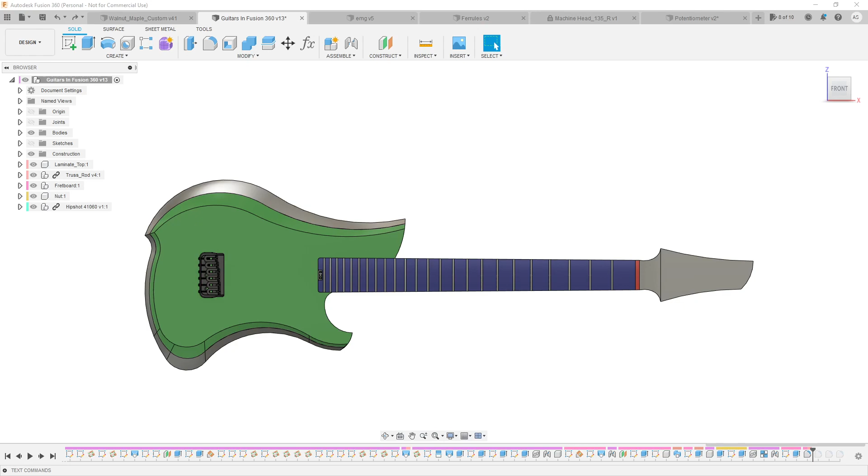Okay, so just like in episode 1 where we laid out some foundational sketches, let's go ahead and do the same thing but for all of our hardware and controls. That way we only have one major sketch, and we're not creating 30 new sketches in this design. So let's go ahead and sketch on the top surface, and let's lay out our tuners first.

So if I hide my body, actually I need that, project in these two lines. I'm going to offset these by 0.375 inches. It might need to go a little bit further than that, but that's okay, I can always go back and update it. Offset by 0.375 inches, that's going to be our center line that our shaft is going to ride on.

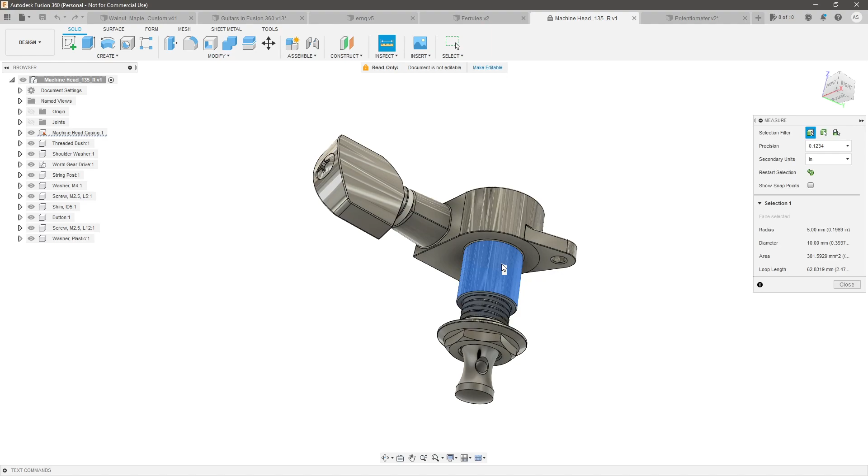So let's go ahead and give ourselves some holes. Make that coincident. Okay, we need to make all these equal. And let's look at our tuner real quick and see what the outer dimension is of this shaft, which is 10 millimeter. But actually, what we're really concerned about is this one.

We need both, but the outer diameter of that is 15.5 millimeters. So what I'm actually going to do is create two circles on one of them. That'll help us figure out if the 0.375 is right. So 15.5 millimeters, and then we've got 10 millimeters. So see, we're good, it's not breaching outside of the headstock.

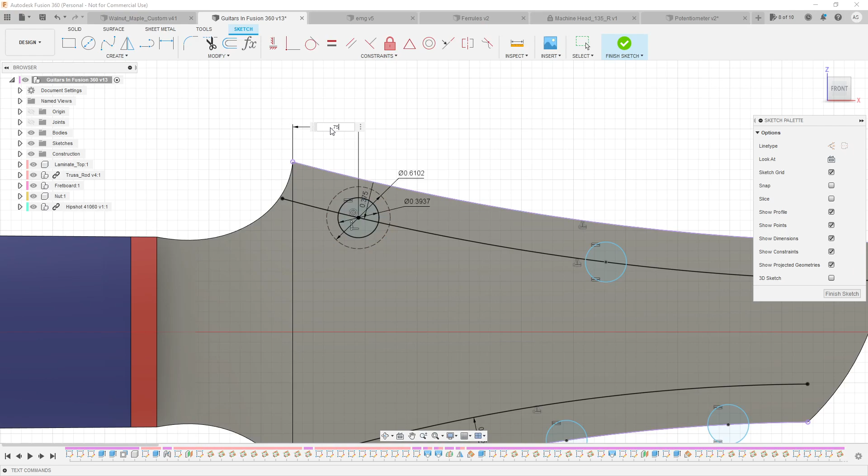So I'm just going to make that a construction line. And then what we need to do is dimension from here. Let's bring our body back to here, 0.75 inches. So that's our first one.

I made these coincident with the bottom, I did not even notice that. So circle, circle, circle. Make these all equal to this one. Make this one vertical to here, this one vertical to this one, and this one vertical to this one. Okay, so now they're riding up that chain and they're staying vertical to each other.

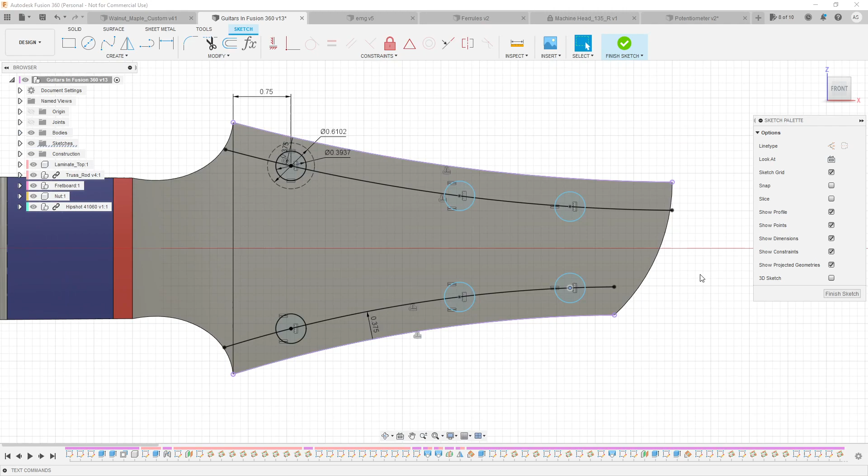So bring the body back and let's go 0.75 from our smallest. And then let's make this a midpoint between those two. So let's go ahead and draw a line here and a line here. Make these construction and make them equal. So that guarantees that it's going to be the midpoint between all of those.

So you imagine we could just take those, even though it's sitting on a plane a little bit higher than the actual surface, we can cut all the way through it. So that's the sketch for our tuners.

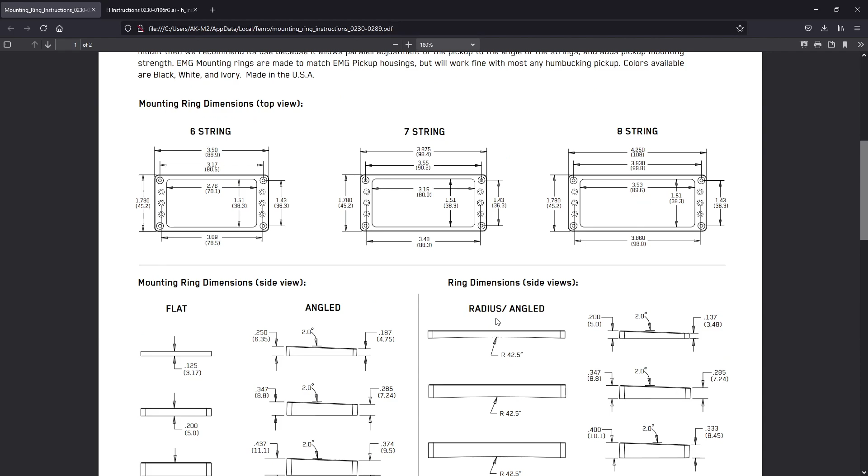And now let's work on the pickups. So if we go to EMG's website, they've got the cutout dimensions that you would need, and they also have the dimensions of the faceplates. And on the actual instructions for the pickups, they've got the dimensions of the pickups itself.

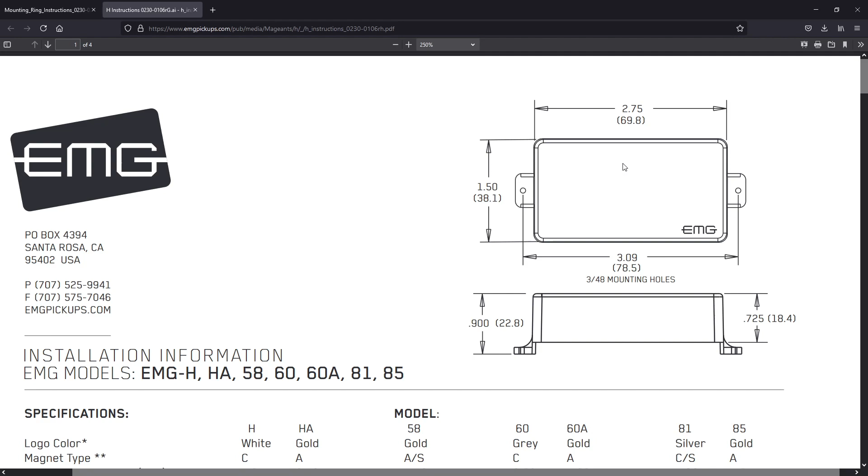Now, I went ahead and grabbed a model from GrabCAD that's pretty accurate, close enough for what I'm doing anyway, but mostly what we're going to be doing is drawing a sketch based off of what we see here. So let's go ahead and go back, and let's make a rectangle and another rectangle.

And let's dimension it. Let's bring in this right here to give ourselves a dimension off of the fretboard of, let's say, 0.25 inches. Actually, I'm going to make that a little bit bigger, 0.5 inches.

I'm going to delete this one. I'm going to delete both and make them a midpoint rectangle, like that. Dimension off of here, 0.5.

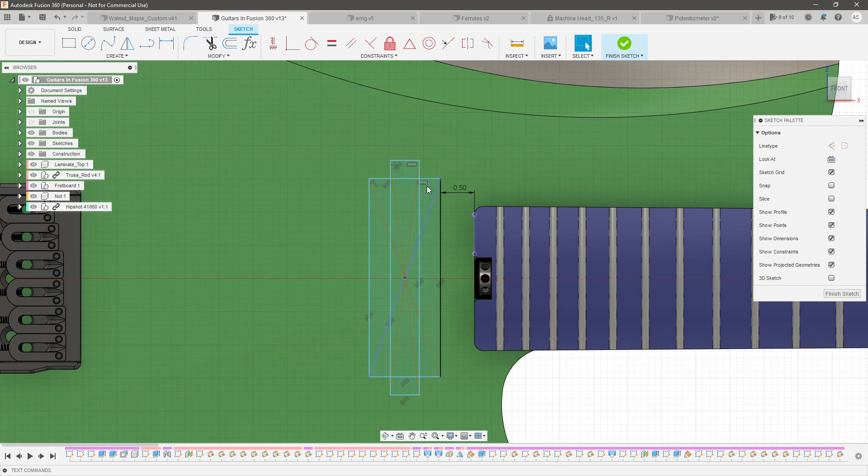Again, we can always come back and update this. And what do we need that to be? We need that to be 1.6. And we need the length to be 3.37.

Okay, and we want to make sure this is a midpoint. So we can create a real quick construction line to the midpoint of our fretboard. Make that horizontal. Okay, so that one is locked in.

And then we need the, actually it was 3.37 to the outside of the long one. So I need to get rid of that. 3.37 inches. And this one is going to be shorter, so 2.84.

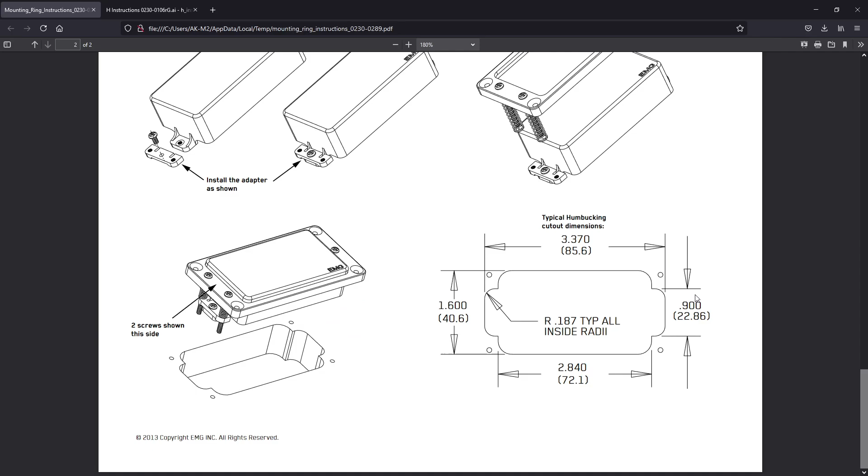Like that. And what's the width of this? 0.9. So this one's going to be 0.9. Okay, so there's our first sketch.

So let's go ahead and highlight all of that. Copy, paste. Bring that over for our bridge pickup. It kept all of our dimensions and relations.

All we need to do is dimension between them. Make that horizontal. And let's give the center point dimension of 3 inches. Now, of course, I can always go back and update that, but that should work for now. Okay, so those two are done.

Now let's figure out where we're going to place the knobs. So let's go here and here. And we need to look at our potentiometer to figure out what that hole size is going to be.

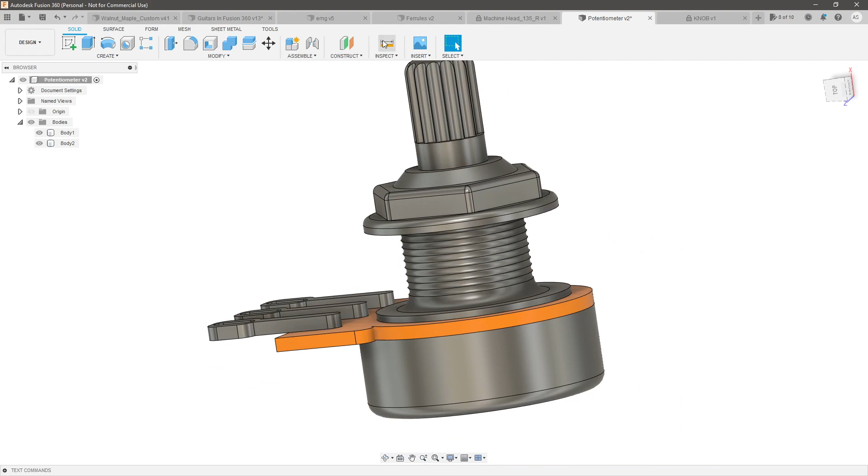So let me go over to the potentiometer I'm going to be using, and let's see the depth. 6 millimeter, basically 1/4 of an inch, which is good. That's the size of our laminated top. And the diameter is 9 millimeter. So let's come over here, make that 9 millimeter.

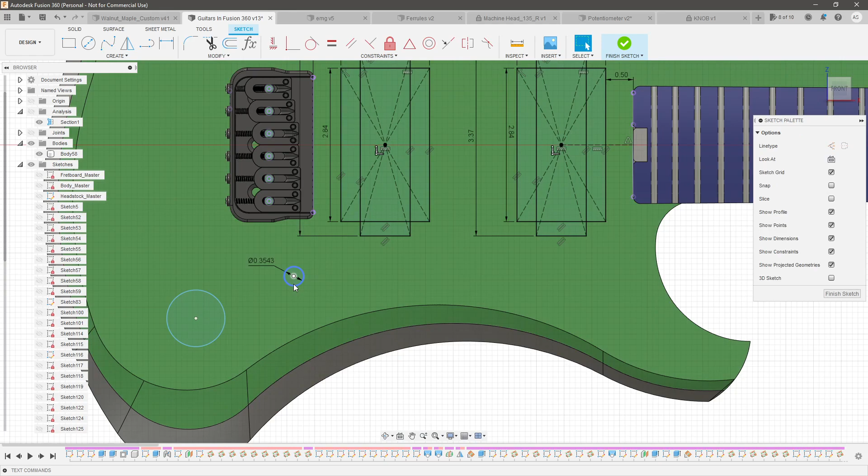Make these equal. Okay. Now let's also give ourselves a construction circle so that way we can see the general size of the knob. So here's the knob that I've pulled off of GrabCAD, which is going to be similar to what I want.

So I want to see the diameter. It's going to be kind of hard to measure off of this, but it looks like there's a point that's straight vertical. Yep, 19 millimeters. Okay. So let's come back and dimension this as 19 millimeters. Undo. There we go, 19 millimeters. And make these two equal.

Okay, now we just need to position them. So let's put this one, let's project in this point right here. Actually projecting that line. Draw that to there. Make these collinear. Okay.

And then let's give ourselves a construction line here. Say we want these, undo. We want these to be 1.5 inches apart. Actually, I think we want them to be greater than that. Let's make these 1.75.

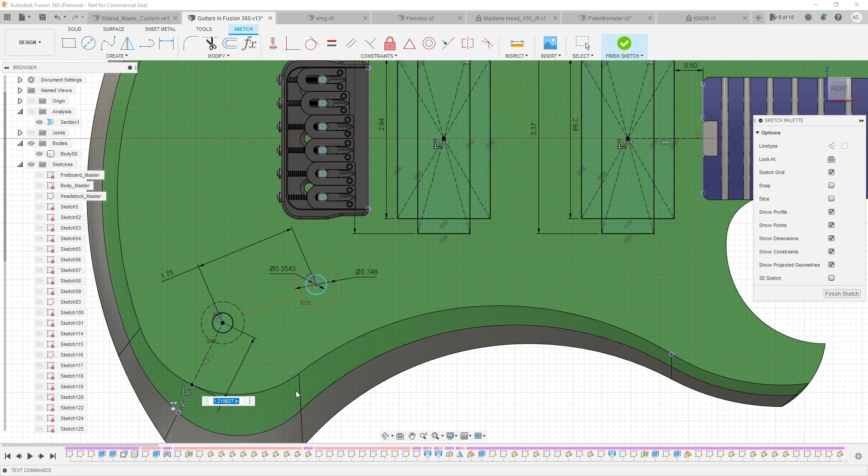Okay, and I want that to come in 1.5. Yep, that's looking pretty good.

Okay, and then we still have our angle adjustment here. So let's give ourselves an angle, 135. It's basically a 45-degree angle if you were to come this way.

Okay, so let's see, we've got that. Let's hide our bodies and see what we're looking at here. Okay, so we've got our headstock sketched, our pickup slot sketched, and our knobs sketched. So that's looking pretty good to me.

The only thing kind of remaining is the toggle switch. Sorry, it took me a second, it's getting a little late. So let's look at our toggle switch on StewMac.

So this uses a 1/4 inch mounting hole. So we need a 1/4 of an inch hole, 0.25 inches. Now where are we going to place that?

So I could place it back here, or I could place it up here kind of like a Gibson. So let me think for a second. Yeah, so I think I want to place it over here.

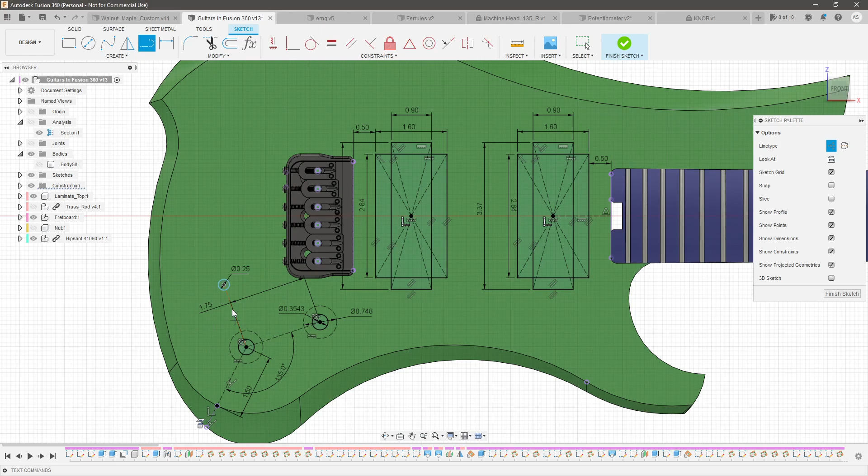So what I'm going to do is give myself another construction line between here and here. Let's go ahead and make these perpendicular. And let's make this come out about the same distance.

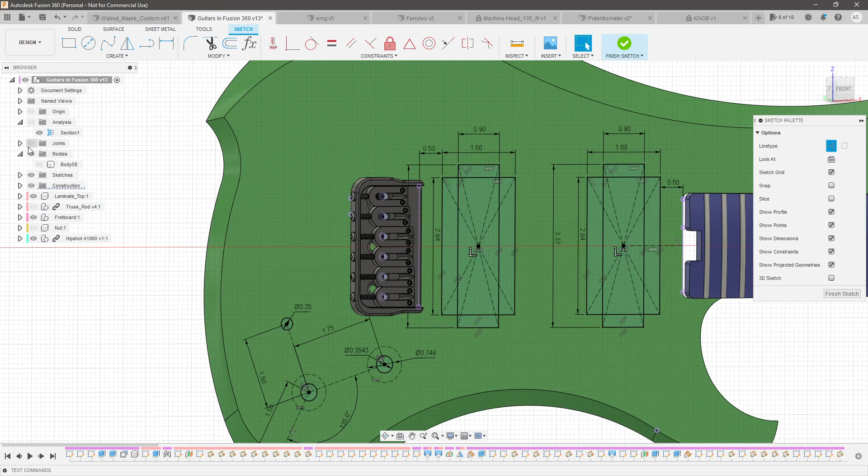an end-pin jack, kind of like what you see on acoustic guitars where your strap actually connects to it. So if I bring back my body, that's going to be going through this wall right here, straight into the body. That way we can have our control cavity come down like that and not have to sweep all the way across into the pickup area.

We're going to end up cutting some channels from the pickup area to route our cables through. So that's looking pretty good to me. Let's go ahead and cut.

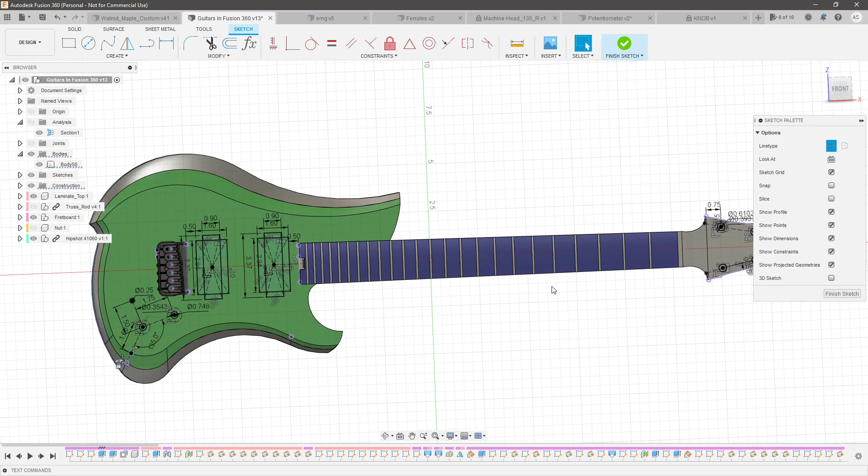So let's grab our tuner holes and cut through to the back of the headstock. Oop, I didn't select this one. Undo. There we go. To object, back of the headstock, done.

And let's bring back that sketch. Actually, we still have it up. Okay, now we need to cut the pickup slots. Actually, before we do that, let's go ahead and grab these ones, since these are pretty easy.

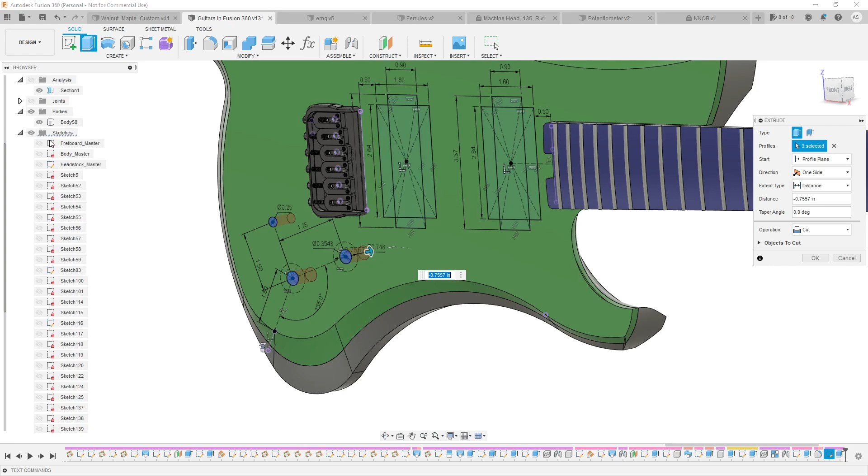Cut through, and let's hide our main body. And I'm only going to be cutting these through to the laminated top, because I'm going to have a cavity in the back that will come all the way through to the laminated top. So that's the amount that it's going to be holding on to.

That's a quarter of an inch, which is the amount of thread available on those as well. So that works out nicely. Let's cut that through. Okay, and then the last thing is we need to cut the pickup slots through both.

So let's select these. Now, when you cut these down, you've kind of got a couple different options. So if you're going to be hard mounting your pickups, 0.75 seems to be about the right amount to bring it down.

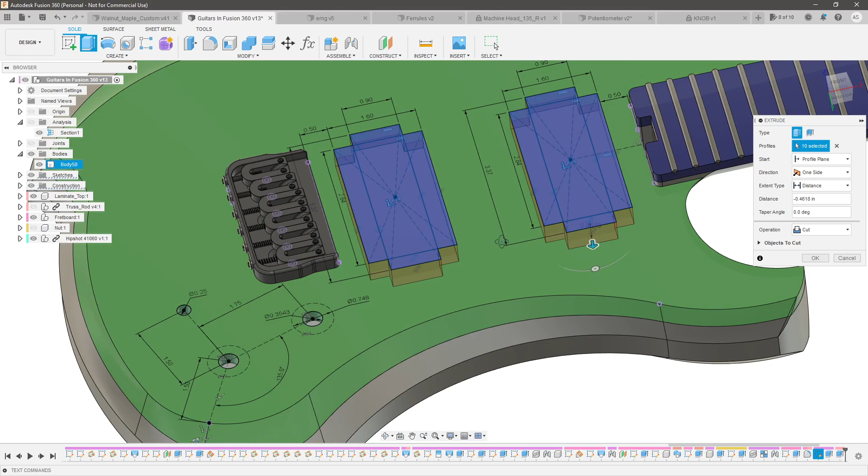But when you're hard mounting, you kind of need to figure that out ahead of time, because you won't really be able to adjust the pickup very well unless you put in some kind of sponge padding or something underneath to act as a spring. So if you're going to be hard mounting, make sure you know what distance you want from the top of your pickup to your strings, and then go from there.

If you're going to be using the mounting plate for the pickups, then 0.75 seems to work pretty well.

Now, they do recommend on many websites that you actually cut an extended slot down for the mounting feet on the pickups. I don't find that particularly necessary, at least with humbuckers, because active pickups tend to want to sit closer to the strings than passive pickups.

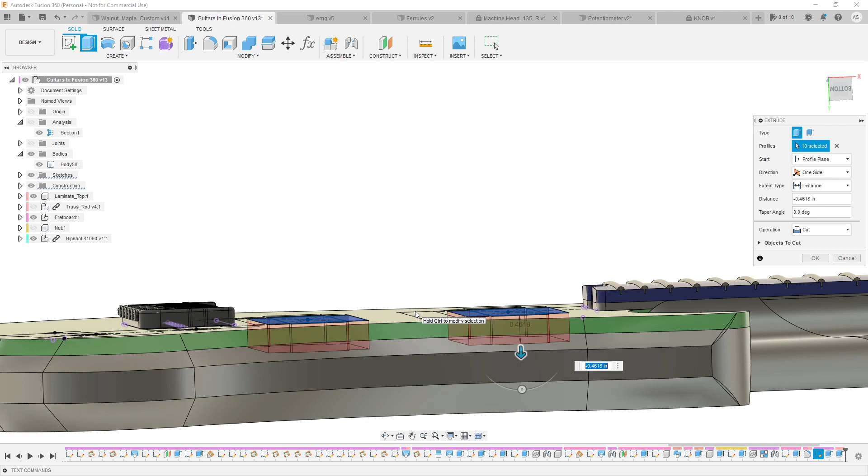And so you're actually going to end up with probably quite a bit of breathing room, even if you mount it at 0.75. But if you're really concerned about it, you can go ahead and extend that down if you feel like you want more room to pull that down. So I'm going to say negative 0.75 inches and call that good.

And then let's go ahead and apply a fillet. Let me see what size that fillet is supposed to be. According to EMG's website, the fillet should be 0.187 on all inside radii, so inside corners.

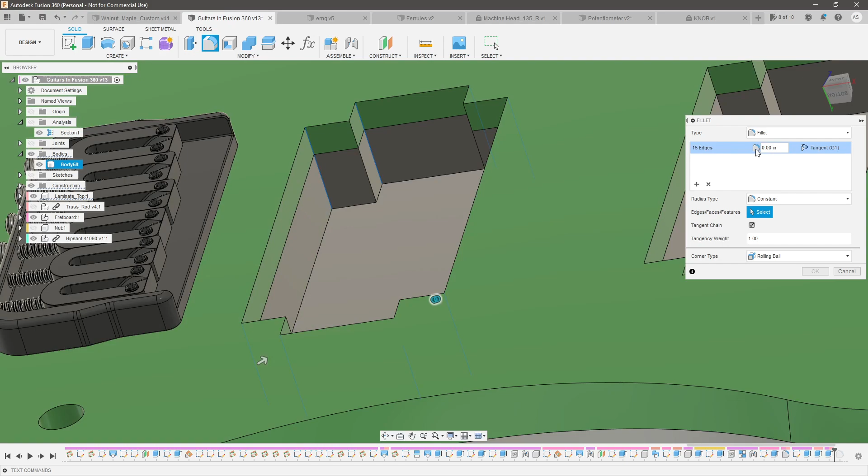Take me a second to select all these. Okay, 0.187. Did I get that right? I missed this one right here. Okay, that's looking pretty good. Let's grab the other ones while we're at it.

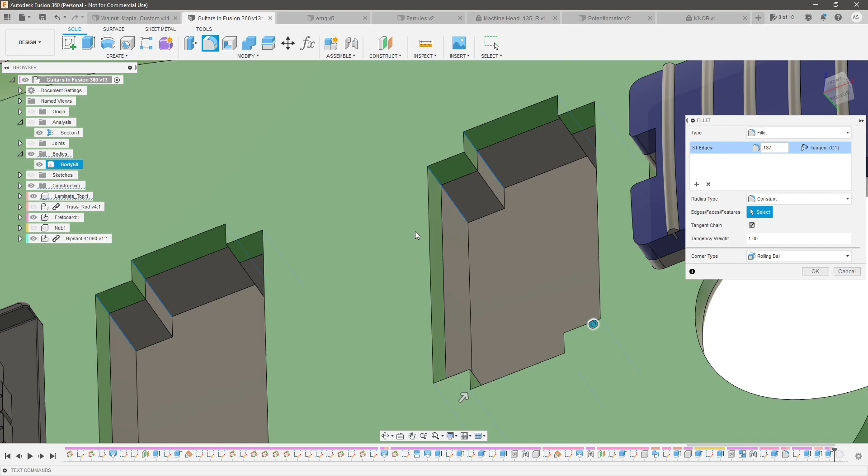Keep going. Trying to do this quick. This is the tedious part of CAD modeling. And I still missed that top one somehow.

Okay, so I got all that. Hit OK, and we're good. So that part's already done. So we've got the tuner holes, we've got the pickup slots, and we've got the preliminary holes for our potentiometers and our selector switch.

Now, one cool thing about having a laminated top - this won't apply to people who have a unibody style - but the cool thing about a laminated top is that you can hide channels behind it that you can pre-route before you glue on the top, which is really cool because then you don't have to take a long drill bit and drill through each pickup slot or into the cavity.

So you can just pre-route those and then cover it up. So what I'm going to do is go back to our last sketch and make a connecting slot between these. So let's go from here to here, make that midpoint, and let's make this 0.5 inches.

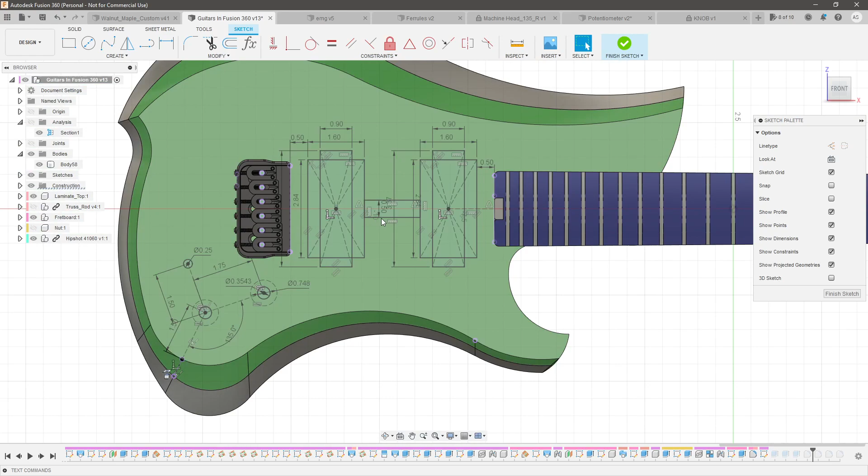Okay, now I'm going to go back to that extrude where we pulled that in, and I'm going to highlight that. So let me show my sketches. Grab that as well. Oop, I actually don't want to do that.

So I need to hide my laminated top, then show the sketch, and do a separate cut down to the same distance, to object the bottom of that surface, hit OK, hide the sketch. So you can see I've got a slot connecting these two, and then all I can do is just bring back my laminated top and cover it up.

So I've got my pre-built wiring holes, which is great. And I'm going to do the same thing to connect it to the control cavity in a moment. Okay, so now we've got enough information to go ahead and cut our control cavity.

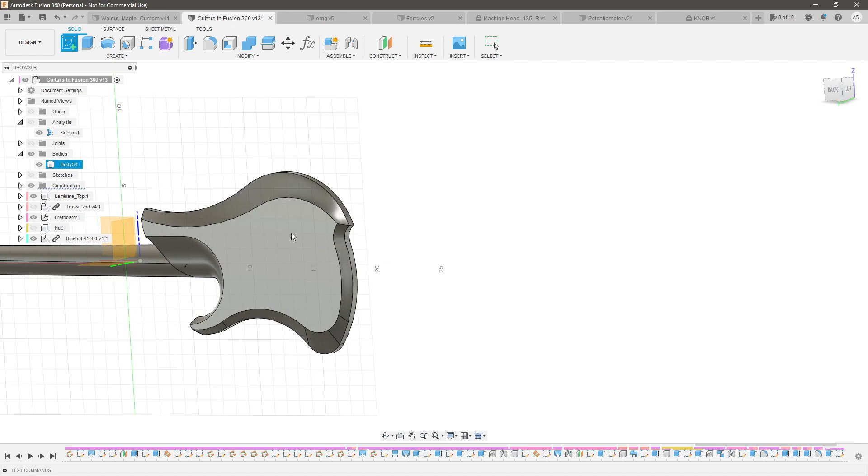So let's sketch on the back surface, and we want to hide our other sketches, this one, for now, and let's bring in this surface, and let's bring in these holes to that sketch, and let's bring in the bottom surface of the bridge. So let's hide the laminated top.

See if we can snag that bottom surface of the bridge and project that in. That way we can kind of see where everything is meant to be connected and we can avoid certain areas.

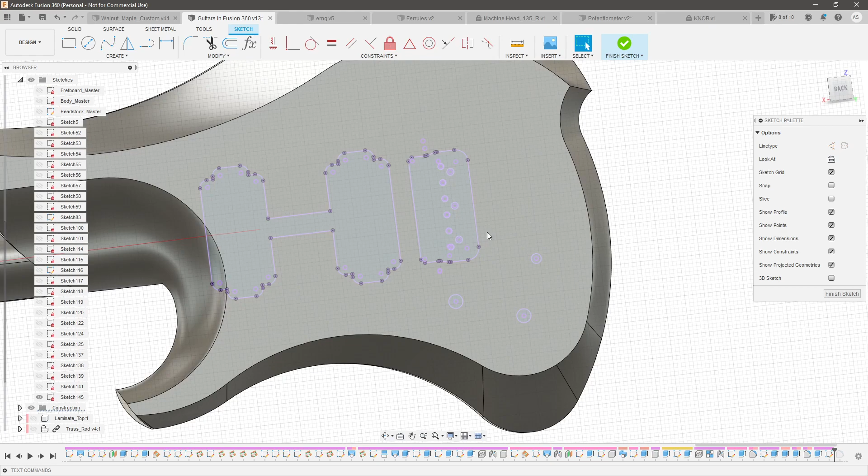So let's go ahead, and what I'm going to do is I'm going to take these lines right here, project those into my sketch, and now I'm going to hide my body. And I'm going to take these and offset them a little bit.

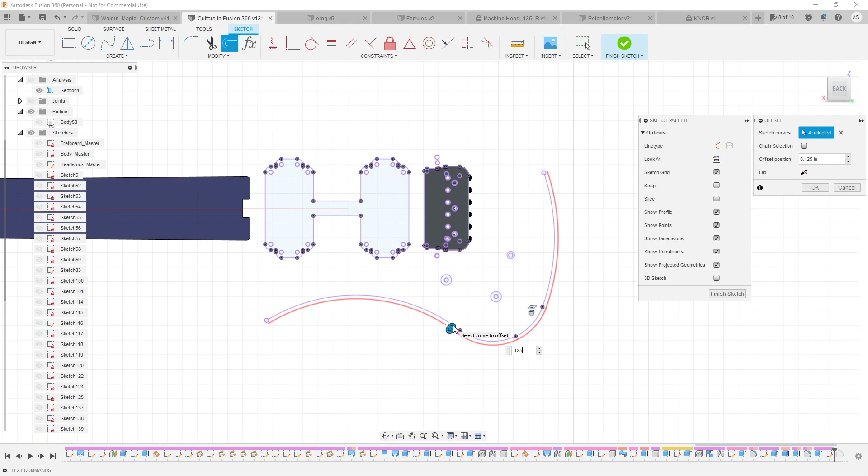So let's go 0.125. That's the wrong direction. Negative 0.125, let's give a little bit more, negative 0.25 inches. Okay, so now, because I did that, if I bring back my body, you can see I've got a little bit of breathing room where the actual cover plate can sit.

So I'm going to make this one a construction line. Go create arc from here to here. Let's make that tangent. And now I can draw a straight line down. Make these tangent.

And I'm going to go ahead and make these. Let's distance this off of the bridge, give ourselves a little bit of breathing room here. Let's go 0.25, like that.

Bring this down, and I'm going to create an arc here that is going to be concentric with the bridge. So concentric, like that. Okay, so that keeps my 0.25 around the corner of the bridge.

Now I'm going to create a straight line over. Let's make that, before we dimension that, let's give ourselves an arc to this line here. Make that tangent. Okay, and then let's make it vertical to the front edge of the bridge.

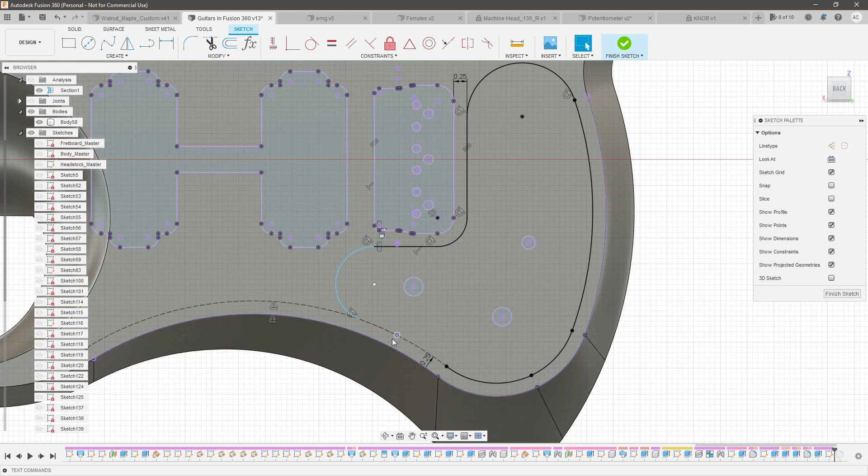Okay, can we make those tangent? We cannot. So what I'm going to do is I'm going to draw a straight line out, make that tangent to that line. I'm going to make that a construction line, and then maybe we can make this tangent to that circle. Come on. There we go.

So that's not wanting me to make that tangent either, and I'm not sure why, to be honest. Let's see. Okay.

Well, what I can do is just connect it to here, and it'll get me pretty damn close. Connect those two. And let's see, I should still be able to move something, it looks like. No, I can't move that.

Can't move that. Should be able to move this. Maybe I just give that a dimension. No. There we go. Okay, so it's liking that. So let's give this a radius of 0.75. So let's just go ahead and delete that line, 0.75. Okay, that's going to get me pretty dang close. I'm all right with that.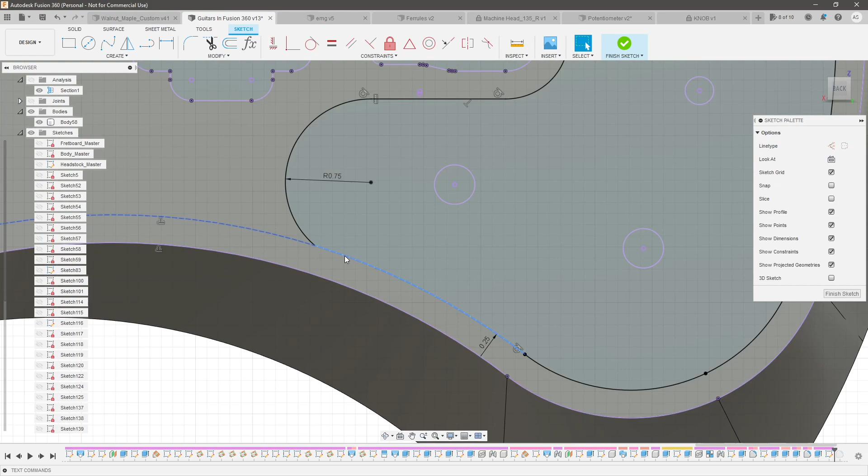So arc from here to here to close up this sketch. Make those tangent. That seems to be working, but it's not defining it. These sketches are not playing very nice today. Why is that? Okay, let's try this again. Create arc. Actually, you know what, I can just turn that off as a construction line and it'll close the profile.

So that'll end up being my back plate. Now the end pin will come in through the side here, right here. That'll leave me room for the other electronics and the battery up here, and that should be good. And then I can end up creating a channel that cuts into this one right here. So let's go ahead and do that real quick as well.

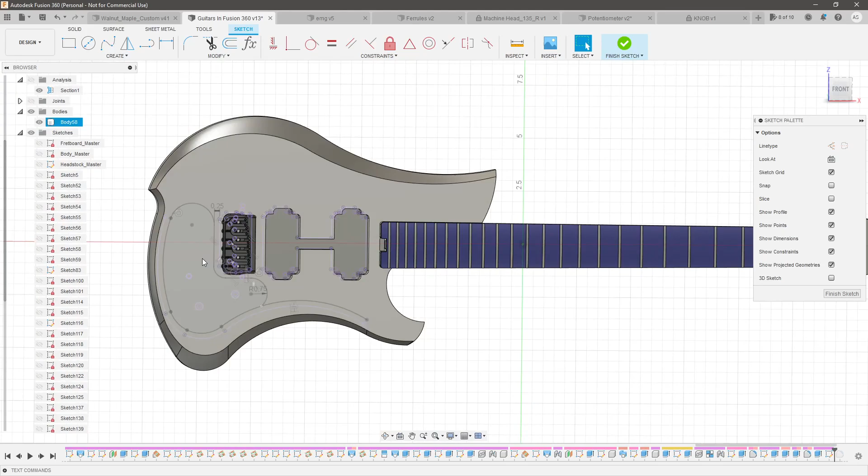So let's draw. Let's see, how do we want to do this? Let's look at it from the front because we can see it a little bit better. So we want a channel like this one right here to come into here. And it's going to be hidden behind the laminated top, so it doesn't matter if it clips off this corner at all.

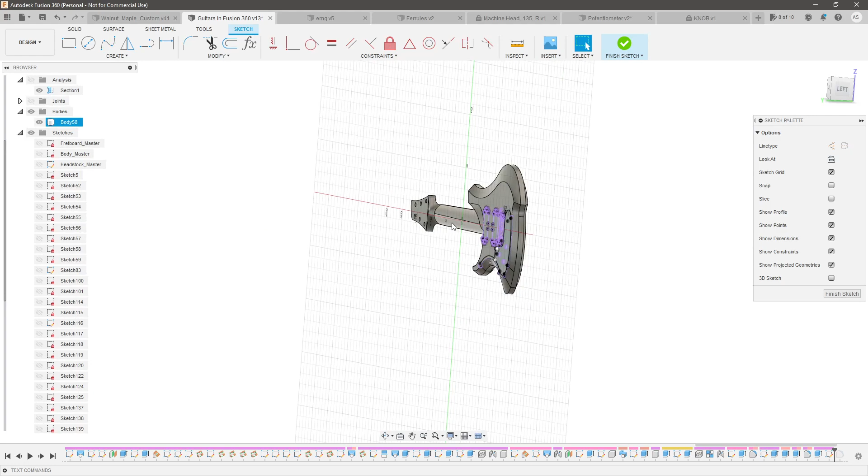So yeah, let's go ahead and clip off that corner. So let's go ahead and draw it from here to here, here to here. Let's make these parallel to each other. We got an extra arc somehow.

Coincident? Make these parallel. Okay, and now it's just going to want kind of an angle. So let's see. That's probably fine the way it is, to be honest, but actually what I want to do, the more I'm looking at this, is I want to go ahead and move this one to here. And let's see, let's do that.

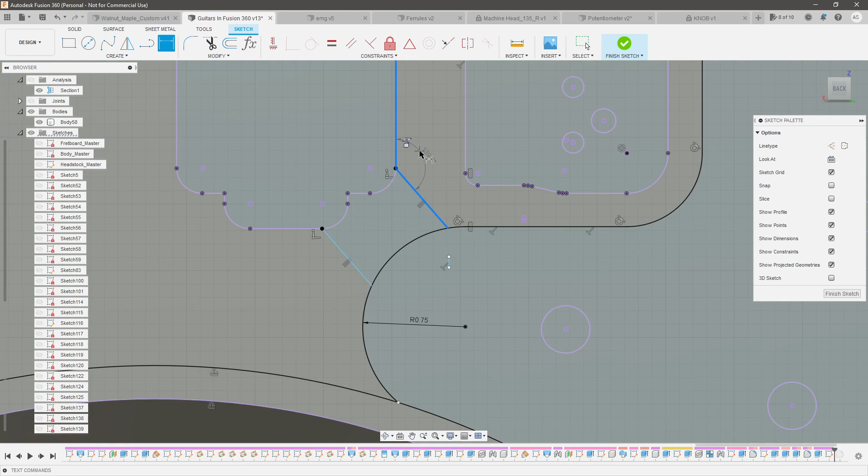So let's see if we can give a radius, or not a radius, yeah, 135. So it's basically a 45-degree angle. That should work for me.

So now what I want to do is I want to cut this up to the laminated top. Actually, I need to do one more step. I apologize.

I need to offset this whole shape right here. Maybe minus this arc. Offset. See if we can offset that. No, it won't let me offset an offset, so that's the problem.

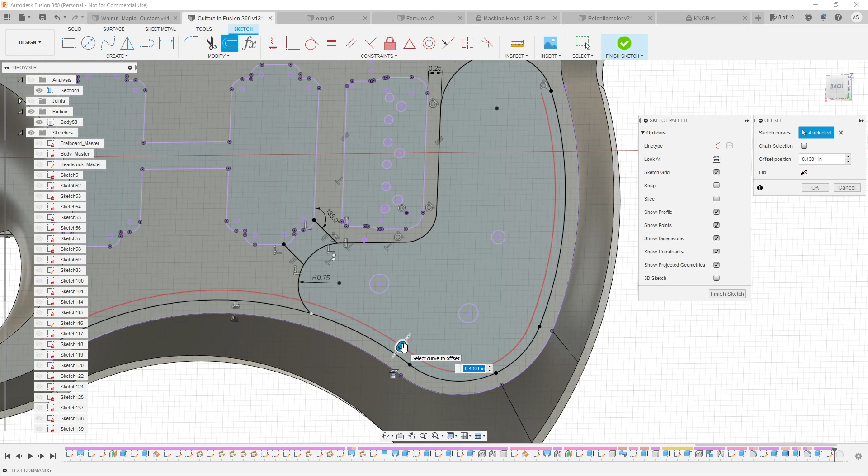So let me grab these ones, offset, and we need to give ourselves a lip so that the back plate has something to rest onto. So let's go negative 0.25, give ourselves a quarter inch lip on all sides, and we're going to replicate that shape real quick.

So there, down to here. Create an arc around the corner. Okay, let's stop real quick and give it some constraints so it doesn't go haywire on us. Concentric. Hold on. Make these tangent to each other.

That's weird. Okay. Sorry for all the goof ups tonight. My computer's, or Fusion's, acting a little strange on me. So make these tangent. Yes, okay, that's what I was wanting. Tangent to here. Okay.

These two need to be concentric. Then we want these two to be vertical. Nope, that went horizontal. I need to bring it over a little bit. Okay. Can we make those vertical? Yes. Okay. So keep going around the circle.

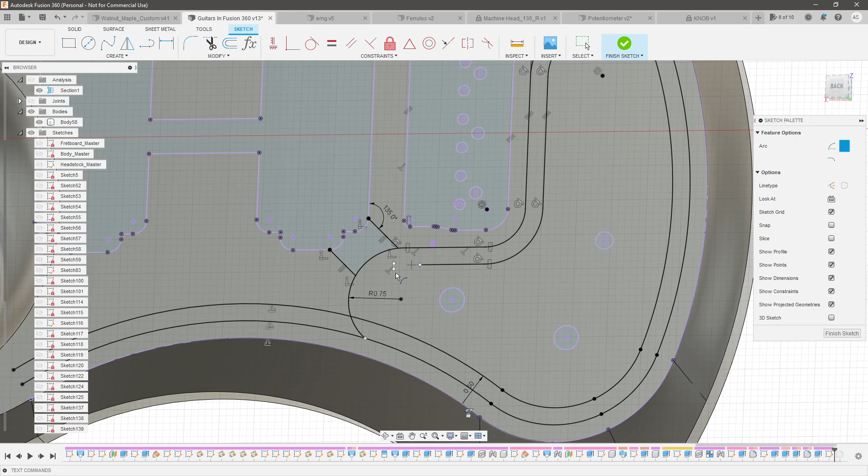Go create arc from here to here. Now I won't think I have to dimension it this time. I think I can just literally make this concentric. Concentric. Maybe not. Okay, let's make these vertical.

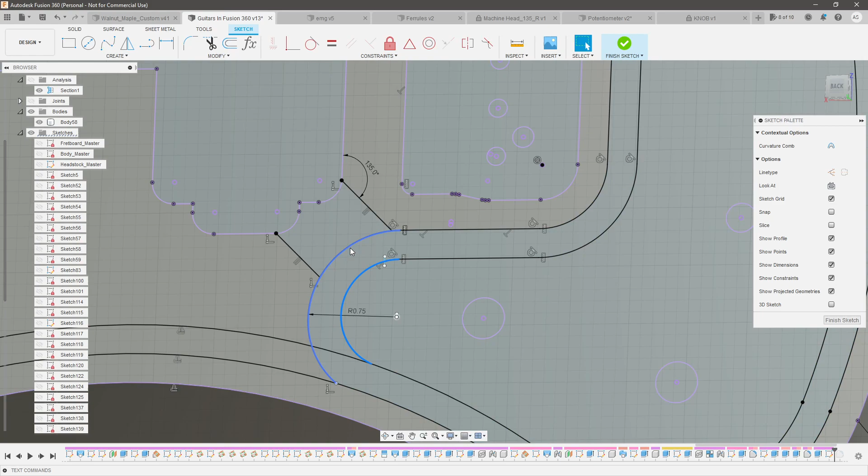As this model's getting bigger and bigger, it's having a harder time keeping up with all the constraints. That's part of the problem. Okay. See if we can make this concentric. Yeah, there we go. Okay, cool.

So now we can cut this inner shape plus we need to actually connect this line and this line because we need this channel to go all the way through. Actually, we don't want that channel to go all the way through, the more I think about it. Okay. So let's cut this up to the laminated top.

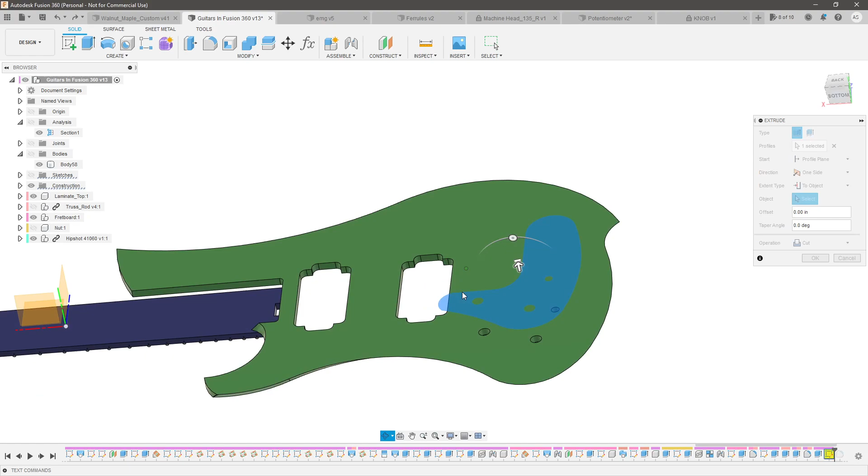So bring back the laminated top, hide the body. Like that. Up to object, laminated top. Bring back the body so that it's a cut. Hit OK. Nope, I didn't select those circles.

So let's bring back our sketch. We want to cut those as well. Okay. Now we are missing some reference in here, and there, that got messed up somehow. So let's redo that.

Saying it's over-defined like that. Maybe that's because it's concentric. No? That should work. Those are vertical. You know, maybe, no, that's going to stay horizontal because it's concentric like that. Maybe I can define the distance between these two. There we go, 0.25. Okay.

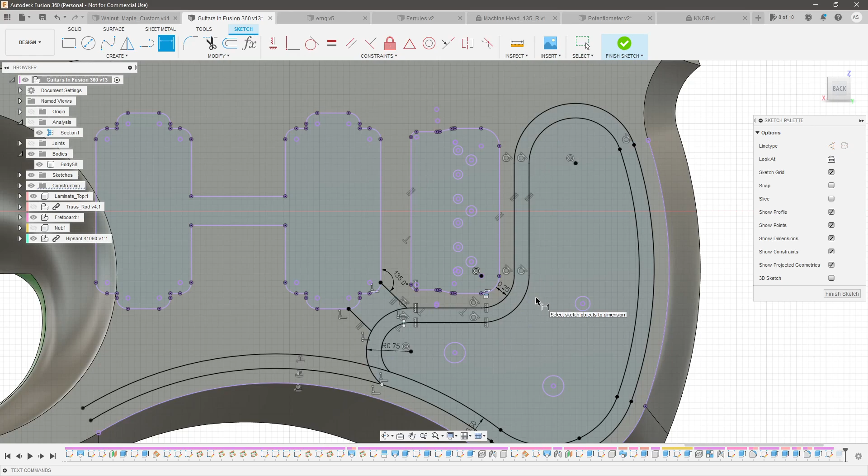Sometimes Fusion really throws fits at weird dimensions. Hit OK. Did that fix it? Yes, that fixed it. So I no longer have an error on that sketch.

Okay. So what we also need to do is cut that channel. But we need that channel to actually be on the same side as this, not where I drew it. And I think that's where I was getting screwed up. So I don't think we actually need this at all right here. We need that on the front side by the original sketch.

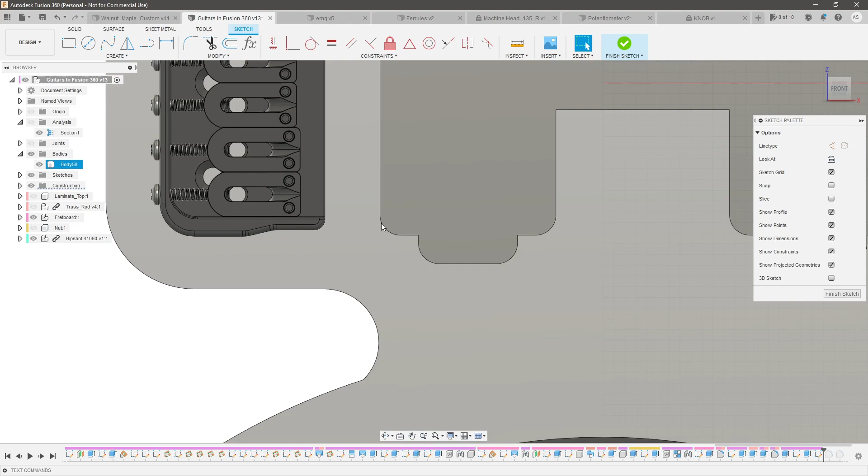So let's go ahead and sketch on the laminated top, or not on the laminated top, on this portion. And let's connect the top of this arc. I need to project that in. Project and come on, project. I need to project in this arc.

So we're going from this point to this point, and then from this point to somewhere on this circle that is parallel to this line. Okay, and then I need to project these in to close the sketch. So we're going to cut that down to the bottom surface of the pickup slot. Hit OK.

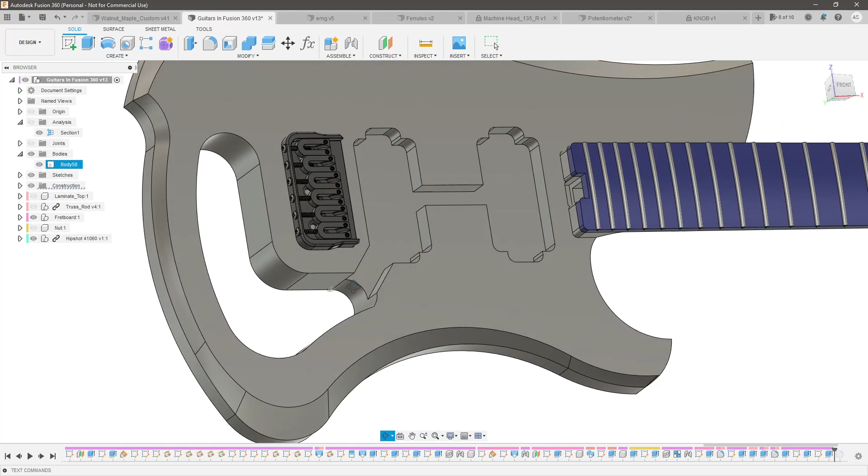So not only do we have the pickup slot, we've got the channel connecting the two, and we have a channel running it to the cavity. So if I bring back the laminated top, you won't see any of that, but you will have the cavity right here, and you can see that hidden wiring channel.

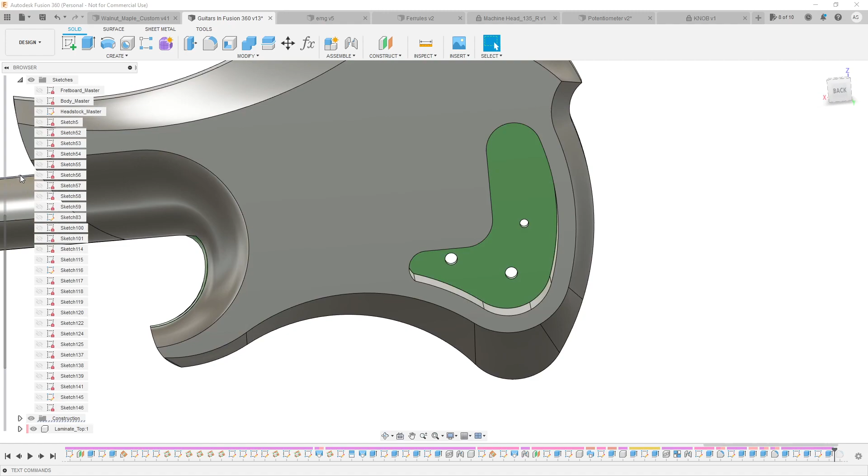So now I need to bring back that sketch. Not that one, this one. And we want to cut this down by the thickness of our control panel, so I'm going to cut that down another 1/4 of an inch, minus 0.25. Hide the sketches, and now we have a recess for the panel that we can put on there. So let's go ahead and make that panel.

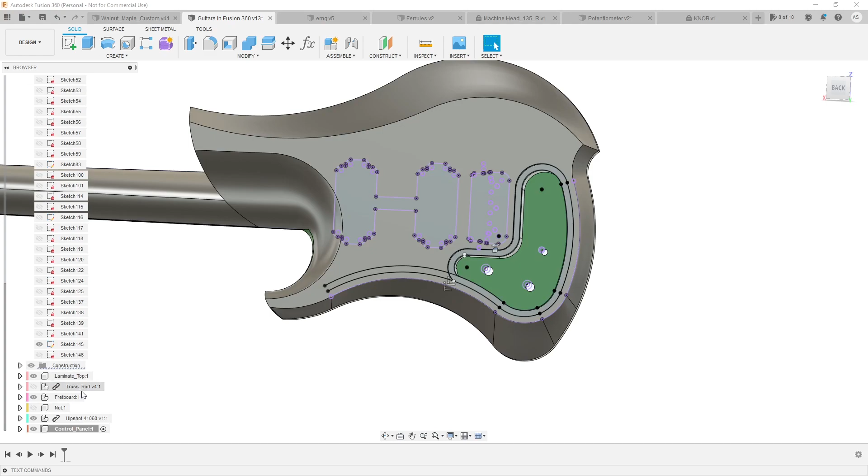So let's create a new component, control panel. Let's bring back that sketch, and inside control panel, we want to take this sketch and this sketch with all the circles.

Bring that down, negative 0.25 inches. Now we should be able to move that in theory, unless I accidentally made it part of - nope, okay, there we go. So right here I want to join that to this. There we go, hit OK. So now we've got our control cavity.

Not too bad. So the last thing I need to do before installing all the hardware and finishing up the guitar is cut 2 holes for end pins, so we can have straps on the guitar. I'm going to be using an end pin jack rather than a Fender style where it comes out the side here. That just seemed easiest for my design. So let's go ahead and do that.

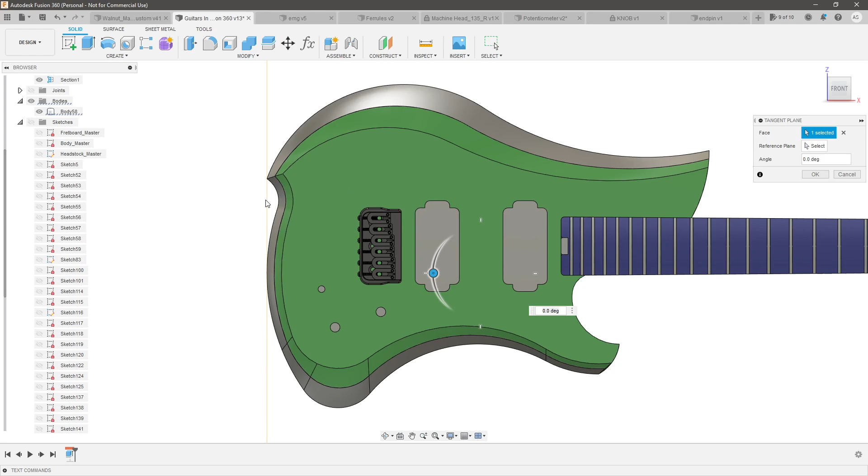So I need to place my end pin somewhere within this control cavity, tangent to this surface. I'm going to go construct tangent plane right here, and that's going to give me a plane that's both tangent to that corner and right here. So let's hit OK. Sketch on that plane.

Reorient, and let's project in this wall right here. What I want to do is find the midpoint, not of these lines, but between here. So let's grab these two lines, make them equal, and make the center point vertical to the tangent point of this circle, which is right there.

Most end pins are around a 1/2 inch - I think the one I was going to use was around 12 millimeter. So I'm going to say 1/2 inch because that gives me a little clearance. So 0.5 inches, and I can make these construction lines. And let's cut that into the cavity. So we're cutting that.

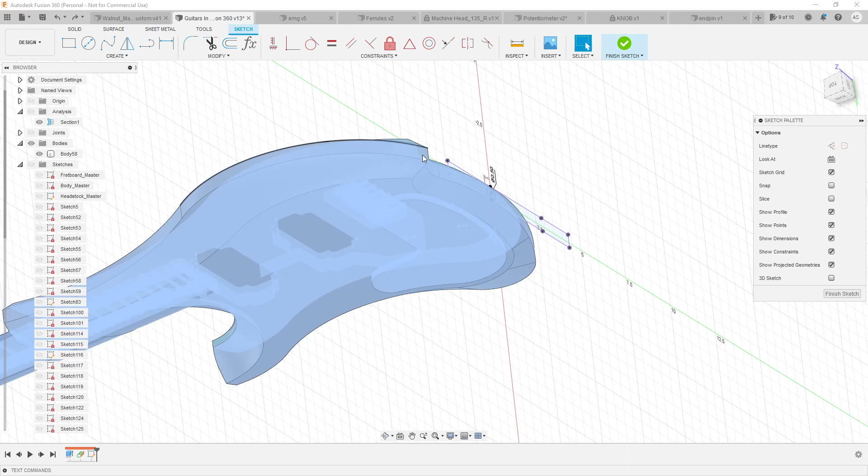We're still in the control panel, so I need to back out of that. I need to come back into here. I need to redraw that sketch. I apologize, I'm still in this component. So let's go back to the body.

Create tangent plane here. Hit OK. Sketch right there. Reorient again, give ourselves our - project that in, and give ourselves our two construction lines. Make them equal, and make this vertical to the tangent point.

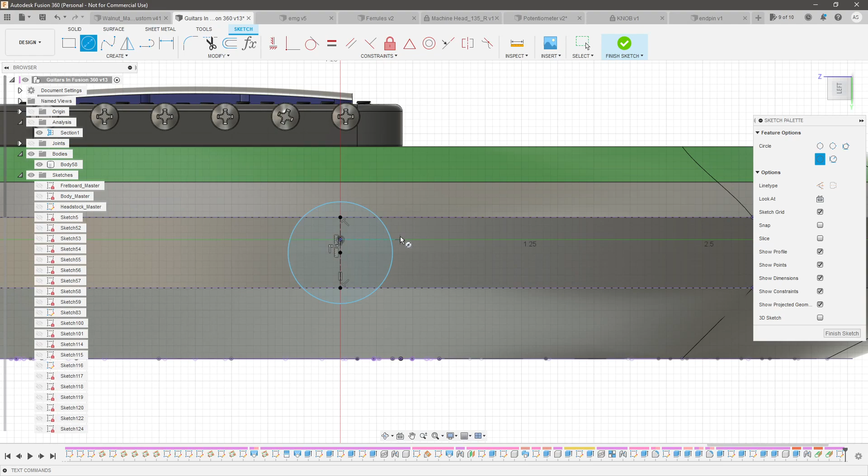Give ourselves a 1/2 inch circle, which actually happens to be the distance here, but just in case I ever decide to change the thickness, I'm going to give it a dimension of 1/2 inch. So 0.5 inches. Okay, so now we can cut that, there we go, into the control cavity.

So let's hide the panel, and we want to go up to this object right there - so that's where my end pin is going to be coming in at. Okay, so there we go. So now we have enough to start installing all of the hardware, apply some appearances, and tidy up this model.

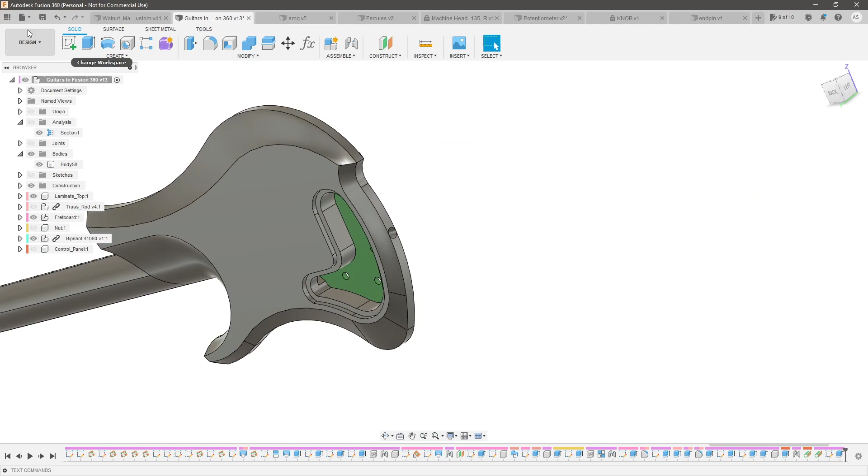Let's bring back - actually let's leave the control panel off for now. And let's go ahead and install our potentiometers. So let's go potentiometer into the design. Hit OK. And let's mate this circle right there to the top right here.

Hit OK, you can see that's sitting inside there. Now, when you install it, you could reorient those. So I could do that right now so it's facing a better direction. Let's go 270. Let's copy that, paste it over, do the same thing over here.

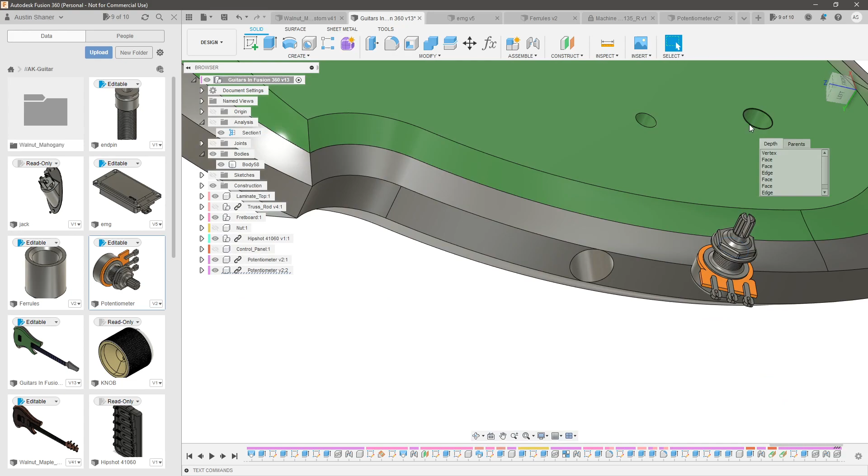Grab this one here, join it to, not to that dot, to right there. Hit OK. And let's reorient that one too so it's pointing a little bit better direction.

Now let's grab our knob, drag that into the design. Come on, if the computer ever decides to load. There we are. Okay, now I do kind of regret picking a knob that already had knurling on it, because

that makes my design a lot more complex and makes the overall design slower to calculate. But let's grab that point and see if we can join it. No, we can't do that. So can we grab this and make it to here?

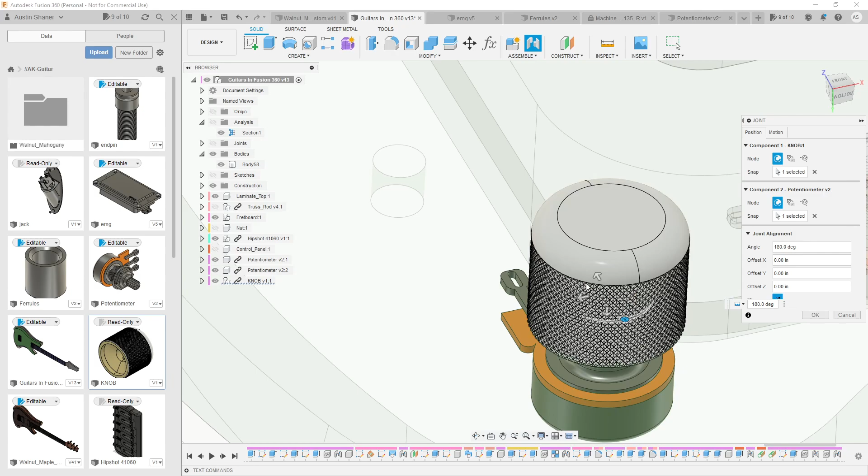See what happens, flip the orientation. It should work, let's see. Nope, it's going into the body a little bit. I didn't make it high enough.

So let's bring that up negative 0.065 and see if that fixes it. There, that's looking a little better.

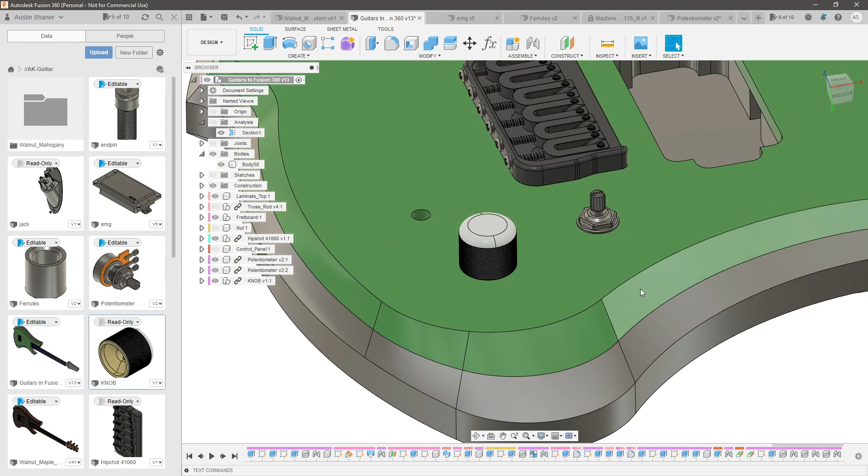Okay, so let's take that same one. Probably should have done these last, but that's okay. Copy, paste. Hit OK. Ooh, what just happened there?

Okay, it's just being slow. Let's grab this circle again, join it to here, join. Probably have to flip the orientation again and raise it up 1/16 of an inch, so negative 0.065 inches.

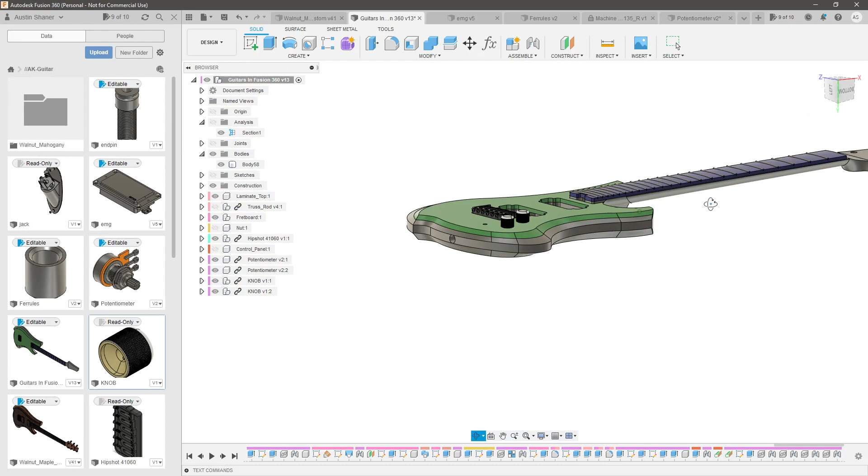Now I need to quickly save this design because I haven't saved it the entire time. Okay, never mind, I thought it was going to take a second to load all that. So we're good. It is weird because as you move the model around, those knurling disappears and then it kind of comes back.

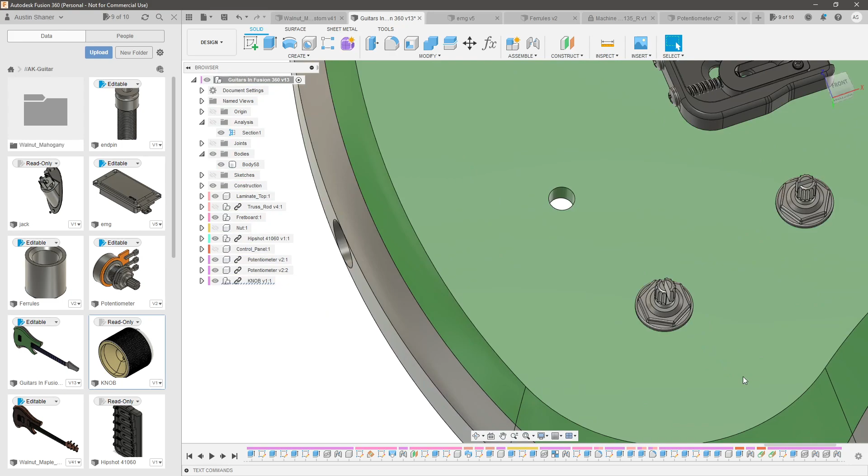But let's grab that point and see if we can join it. No, we can't do that. So can we grab this and make it to here? See what happens, flip the orientation.

It should work, let's see. Nope, it's going into the body a little bit, I didn't make it high enough. So let's bring that up, negative 0.065 and see if that fixes it.

There, that's looking a little better. Okay, so let's take that same one. Probably should have done these last, but that's okay. Copy, paste. Hit OK, ooh, what just happened there?

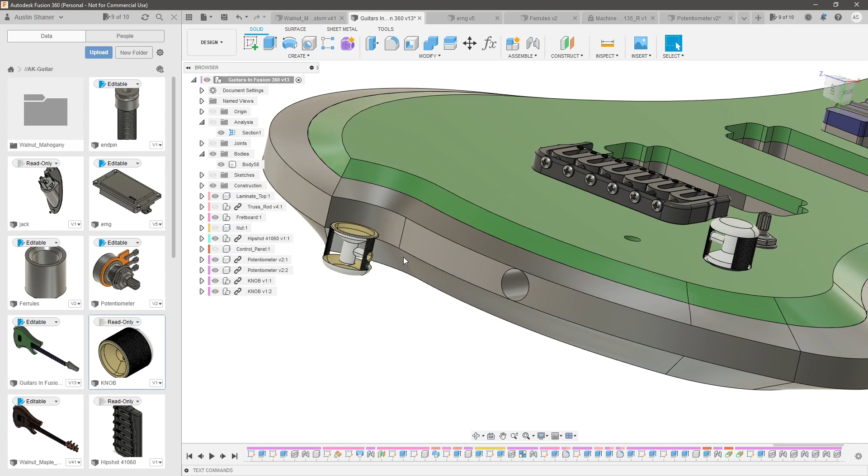Okay, it's just being slow. Let's grab this circle again, join it to here, join. Probably have to flip the orientation again and raise it up 1/16 of an inch, so negative 0.065 inches.

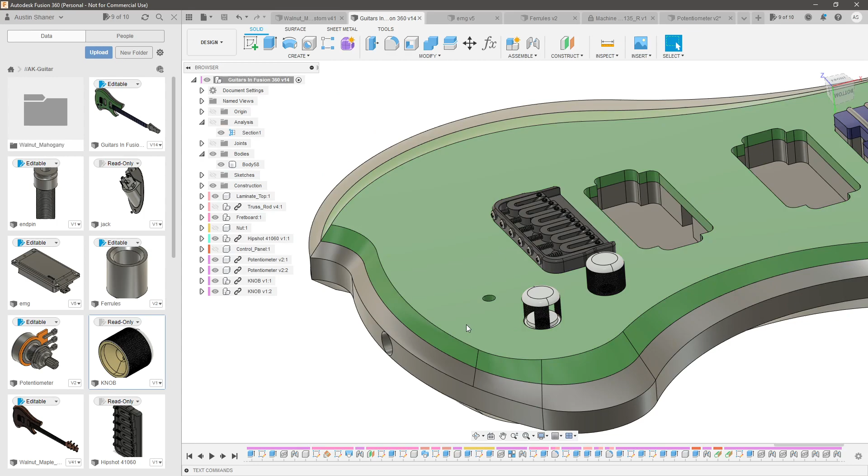Okay, now I need to quickly save this design because I haven't saved it the entire time. Okay, never mind, I thought it was going to take a second to load all that. So we're good. It is weird because as you move the model around, those knurling disappears and then it kind of comes back. See, there you go, okay.

So now we can install our tuners. I have a couple different styles of tuners in here. It's all kind of based off the Hipshot design, but it's got different angles for the securing screw. So let me drag this one in here.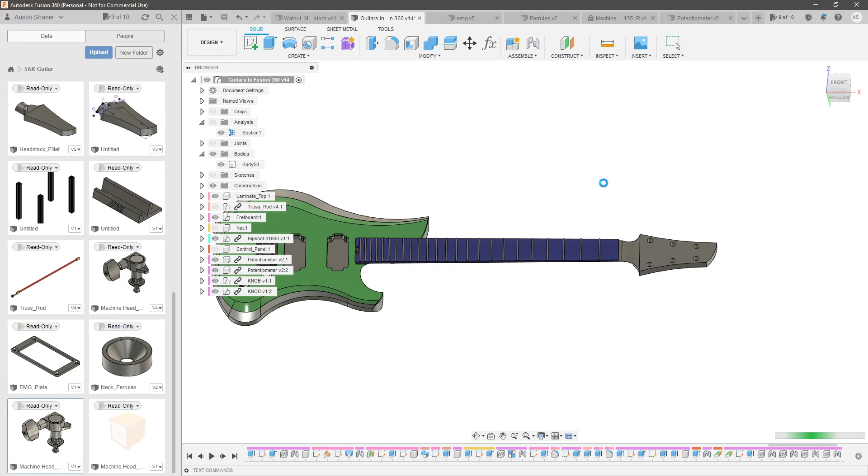Hit OK, and for the time being I'm going to hide those knobs so that way they don't mess up my model. Now I've got speed back again. Okay, so we want to join the bottom of this shaft to the back of this hole. We want to flip it, and then we want to make sure it's oriented.

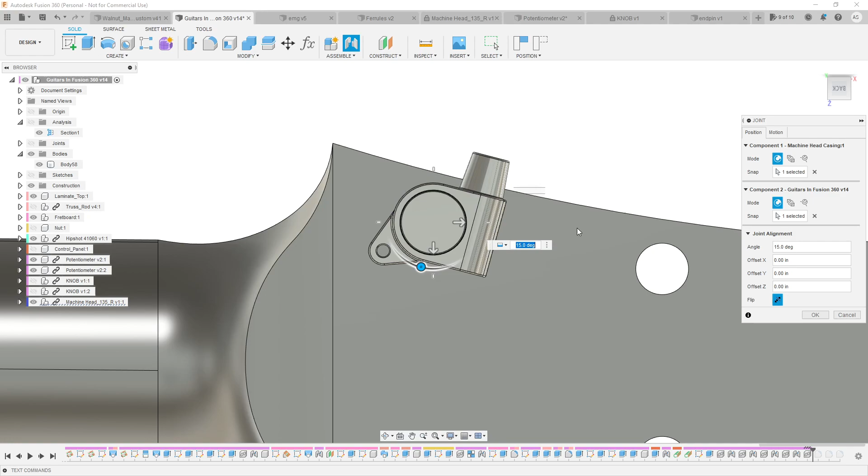So do we have the right one, first of all? Yes we do. Okay, because I want them all pointing towards the body. So this is just for visual purposes, so the angle here doesn't really matter, you'll set that when you install it. So I'm just going to kind of make it parallel to that edge. That looks pretty good, okay, let me grab the next one.

Might do a time lapse here.

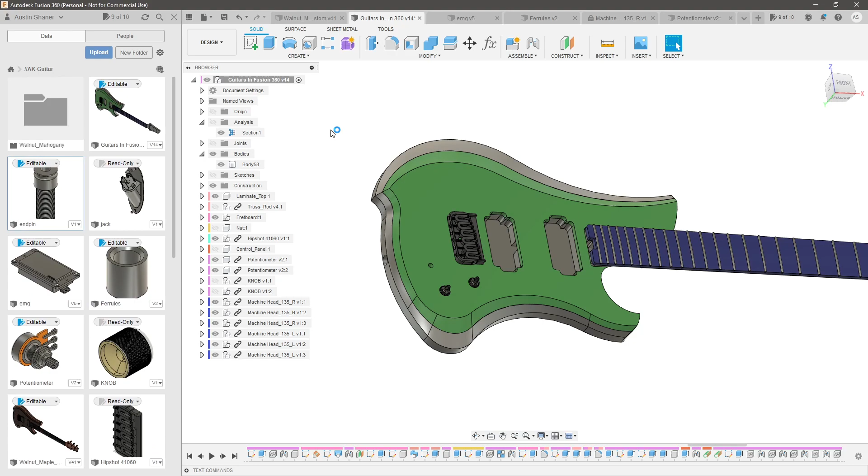The tuners are done, so let's go ahead and install the end pin. I modeled up a brief end pin off a design I found online. It's not really critical how it looks, all that matters is that the hole diameter is correct. Let me bring that in and join it to this circle.

Okay, I need to find a way to make that concentric. Yeah, there we go, perfect. So there we've got our end pin.

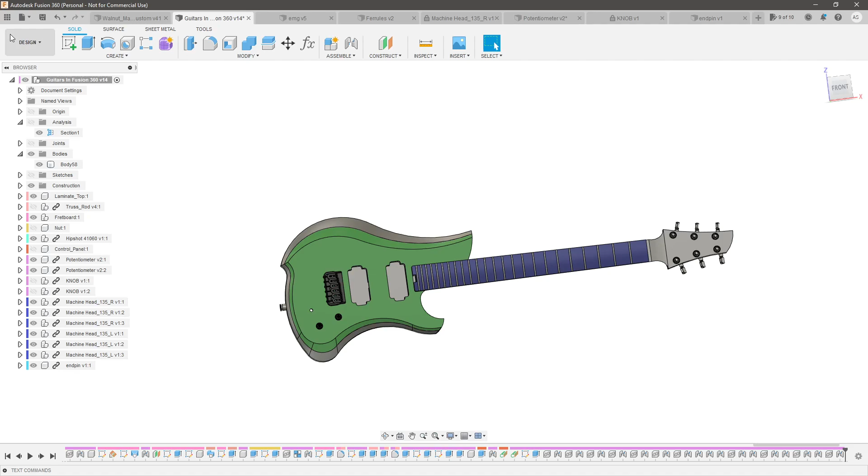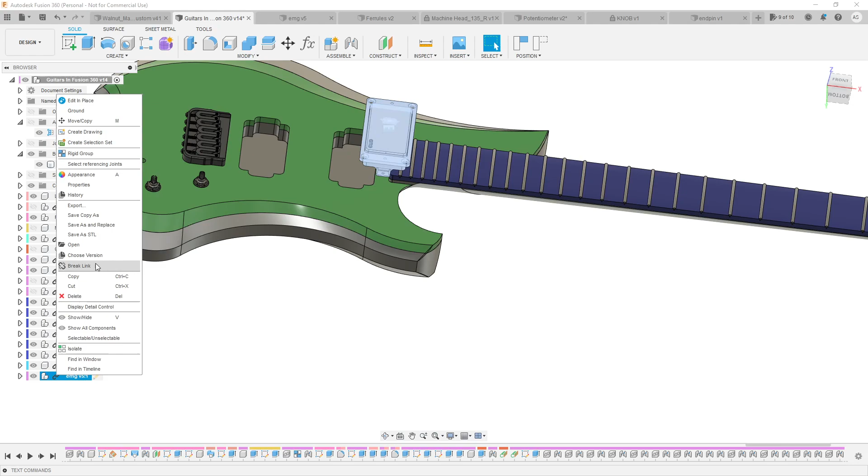Now let's install the pickups. Let's rotate these into place. What I'm going to do is make this pickup transparent. Where's my opacity controls? I need to break the link in order to do that, which is fine. Opacity, 50%. And then I'm just going to join this plate to the top surface.

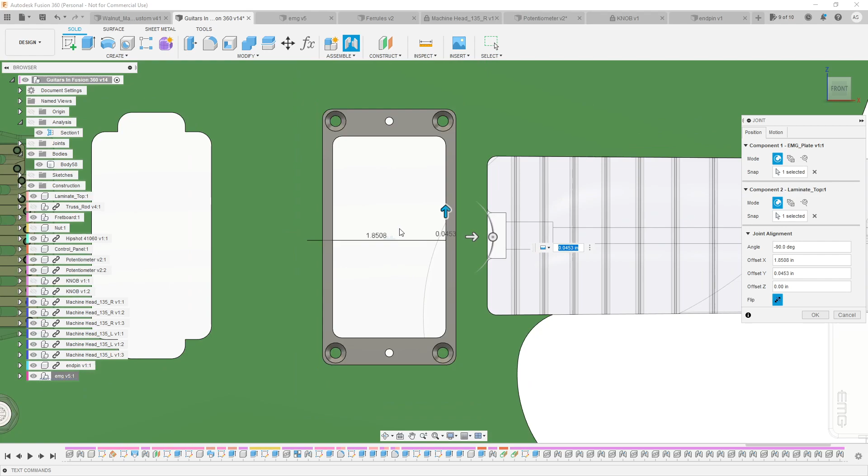I'll just eyeball it, only because I didn't give myself the screw holes here, but I'm not going to be making those in the CNC, I'll just be drilling them by hand when I get to it. So let's get this close, bring that up, and see if we can find a center. That should roughly be it.

Let's make this transparent too. Nope, I can't, okay that's fine. We'll paste a new one. Nope, we still had that copied. Undo, let's take the transparency off of this. Copy that, paste it over.

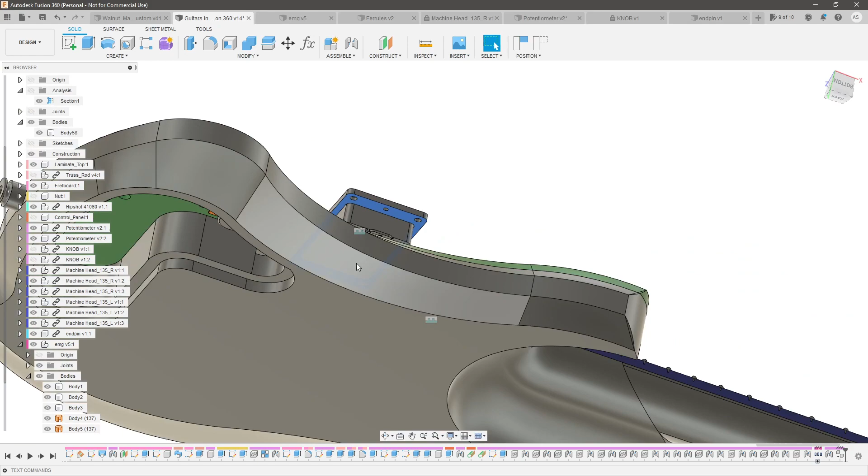We're going to do the same thing over here, so we're going to go join, cancel. Let's make sure we've got this parallel to this one over here, and then get that into place right about there.

Okay, so there we go, there's our pickups in place. And let's bring back our knobs.

All the hard work is pretty much done. We've got all the hardware installed, we've got the guitar fully modeled. There's only really two things we need to do: one is we need to apply some fillets to any remaining surfaces we haven't, and then apply appearances and, like opening presents on Christmas, see what we got. So let's go ahead and apply a fillet.

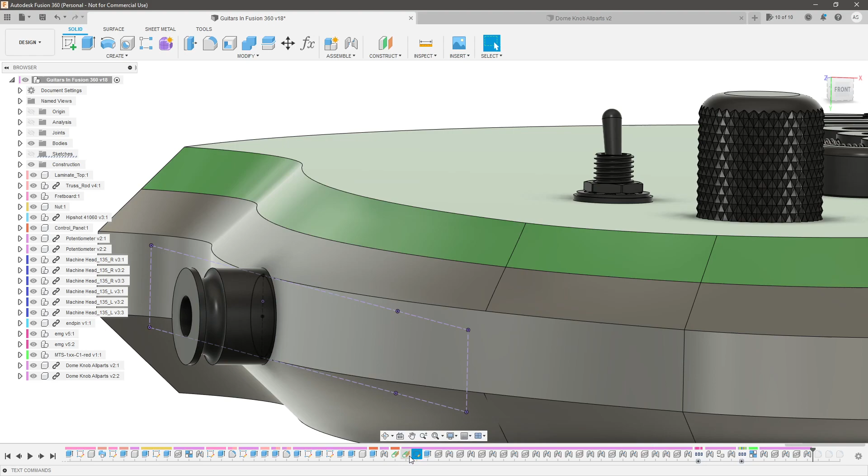Now I already know that the way I did this end pin is going to give me a little trouble, so what I'm going to do is find that sketch and apply my fillets right before that. Let's roll the history marker here and apply our fillets before the cut.

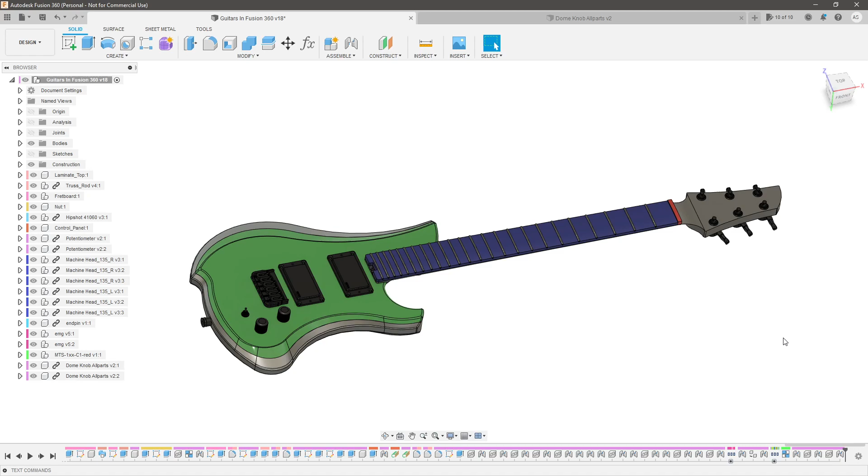Two hours later. Okay guys, I think we finally reached the point where we can apply appearances. It's like opening up a Christmas present when you finally get to see it the way it's supposed to look. So let's open up our appearance panel.

Let's apply our body color, our laminated top color, our fretboard, and our nut. And to the back, let's apply the darker laminated top color.

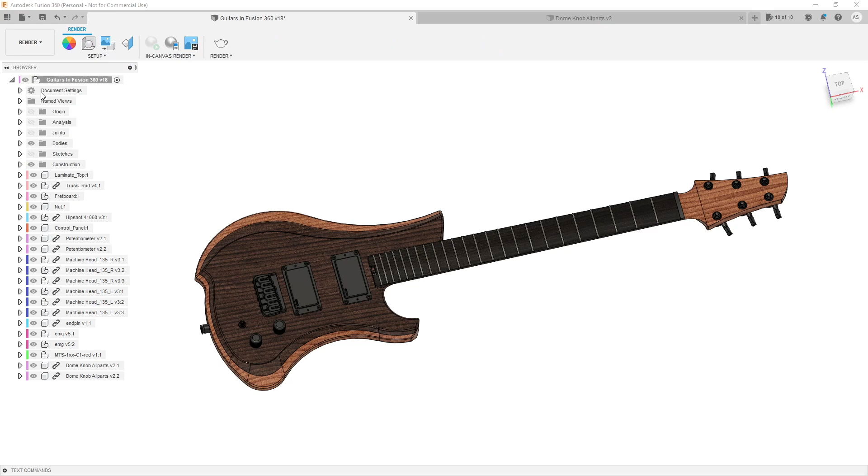Okay, and there we go, that's looking a lot better. It's looking like a real guitar now rather than just highlighted colors for the modeling process. Let's go ahead and open up the render workspace and let's see what we've got.

Hopefully this won't take too long to load. All right, everything is looking amazing. While you guys weren't looking, I secretly added in the potentiometer, or not potentiometer, the switch that I forgot. So that is now in there. And wow, I am really, really happy with how this guitar turned out.

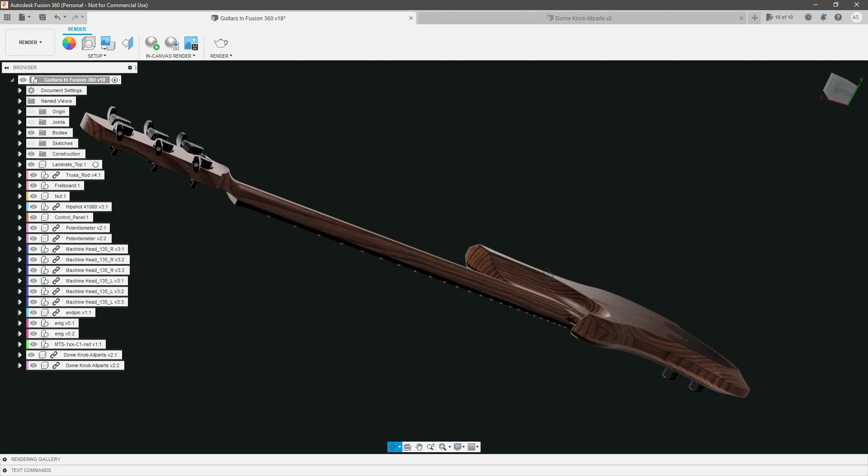I hope you guys like it too. It's certainly right up my alley. It may not be everybody's taste, but I certainly love it. So thank you all for joining me on this journey of how to build a guitar in Fusion 360. I realize this has taken a long time to get to this point, but I finally have a guitar model that I'm truly happy with.

A lot of that, as weird as it might seem, is thanks to you guys for putting up with me and me learning a lot, including better ways to do the headstock transition, better ways to do the neck transition, and overall I ended up with a much better model than my original. I'm really happy with it. Everything's a lot cleaner, and a lot of that is thanks to you guys and this video process we've been going through.